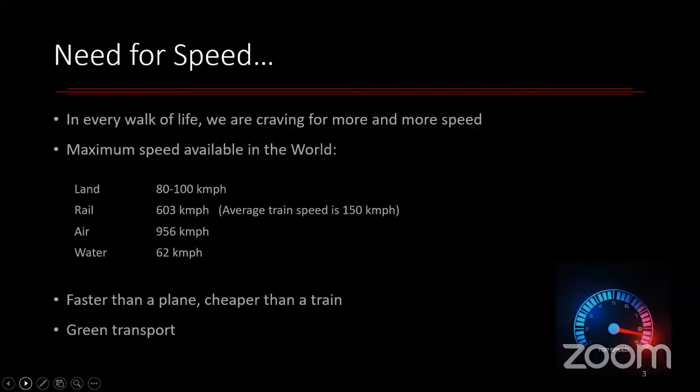So there should be a fifth mode of transport. In 2013, Elon Musk, the founder of Tesla and SpaceX, proposed one technology and named it Hyperloop. He published a paper in 2013, and even after 10 years, it is still under research and development.

What he suggested was a super speed land transport system. And why was it needed? Because he took a survey that found nearly one in 40 Americans commute for over 90 minutes to work every day. And even in India, if we see the maximum, for example between Mumbai and Pune.

So Elon Musk put forward this idea that we can have a super speed land transportation system which will travel at near about 1200 kilometers per hour. This is much more than the speed of an aeroplane.

He suggested there should be a complete vacuum in a steel tube. There would be long steel tubes ranging from source to destination. For example, going from Mumbai to Pune, there will be a steel tube, and inside it, there will be some capsule, called a capsule or a pod. These pods will contain cargo if it's a cargo train, and passengers if it's a passenger train.

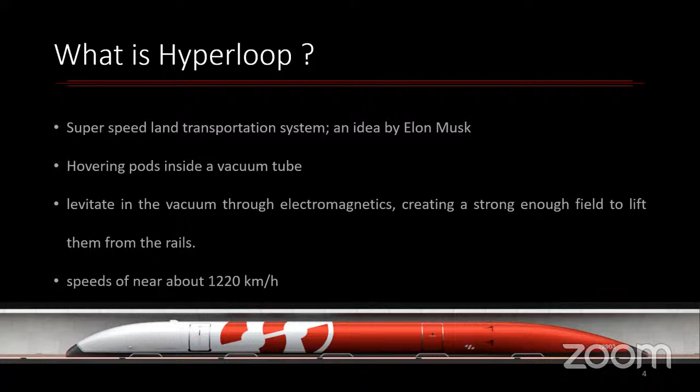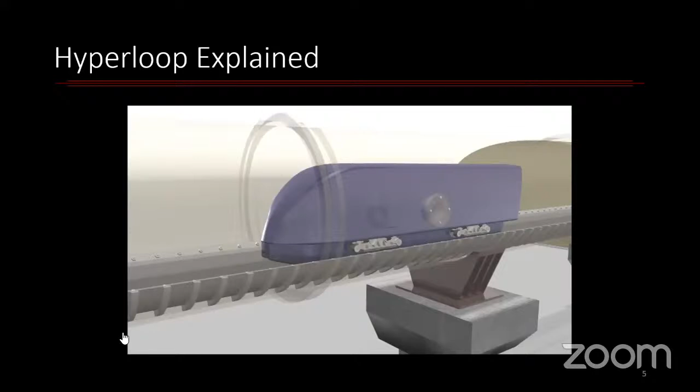I will show you a short video which will give an idea of what Hyperloop technology is all about. Even after the video, I'm going to tell you how the technology works, how this pod is propelled, and how it is lifted over the rails. We'll just play the video, not fully, but up to just 2 minutes. Is it audible, sir?

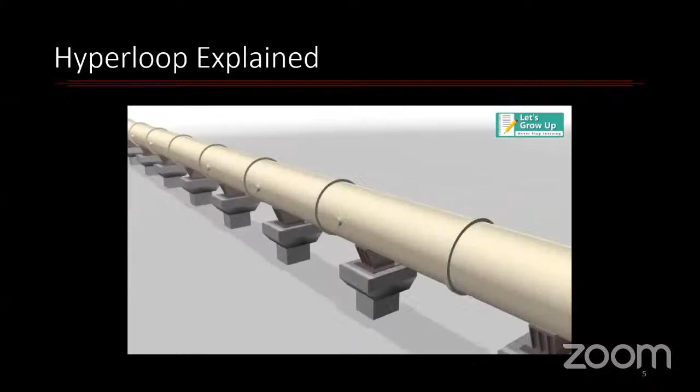No, ma'am. The video's audio is not audible. The video is okay though.

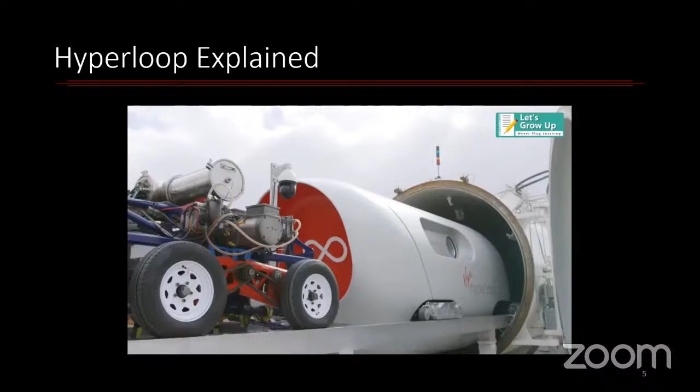Okay, so what I will do is I will do a little bit of commentary over that. That is fine, ma'am, yes.

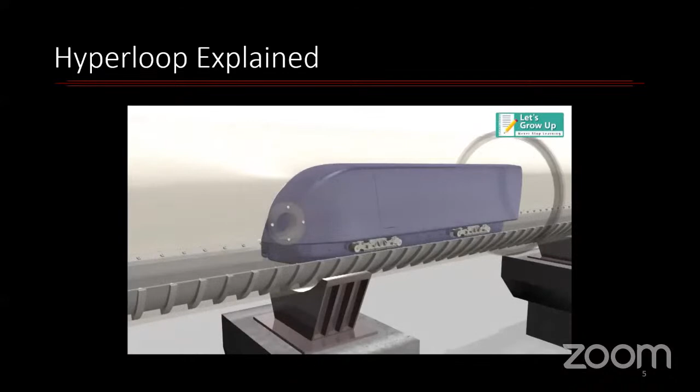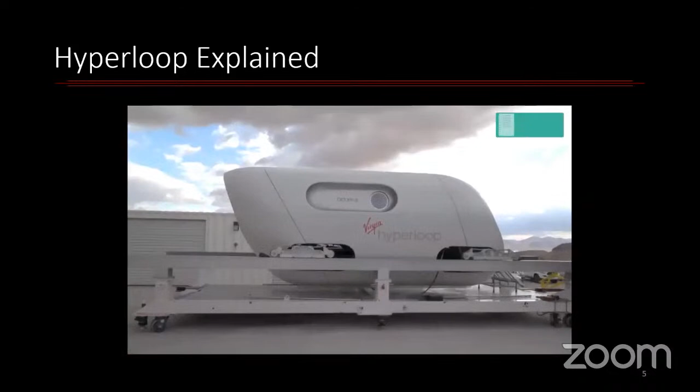So the main attraction here would be the supersonic speed of the pod. Virgin Hyperloop is the company which has first tried this type of technology.

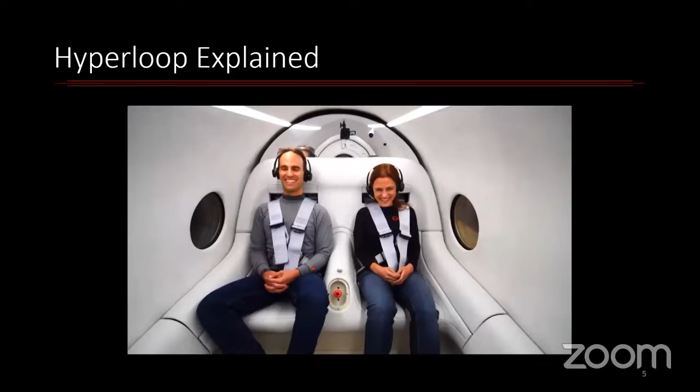This girl sitting inside the pod is Sarah. She is the head of the passenger experience department, and the man is Josh Giegel, the co-founder of Virgin Hyperloop.

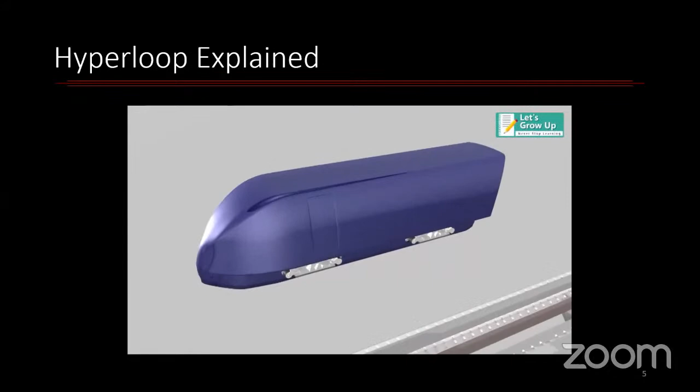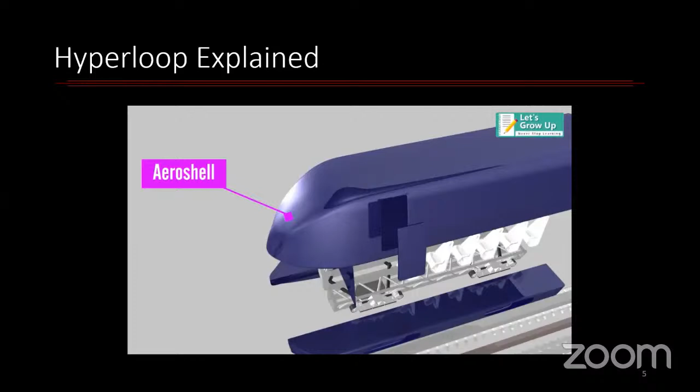Here the levitation theory is explained, showing there should be such type of seats inside the pods for the passenger, and this aeroshell is designed to have minimum air drag. The material used for the pods is carbon fiber because it is lightweight, and this is the chassis of the pod.

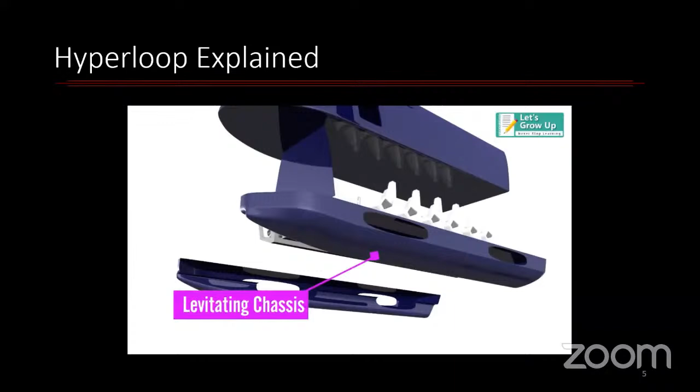It is also made up of carbon fiber, and below this pod there will be a levitating chassis in which electromagnets are used. How those magnets are used, I will explain in the next slides.

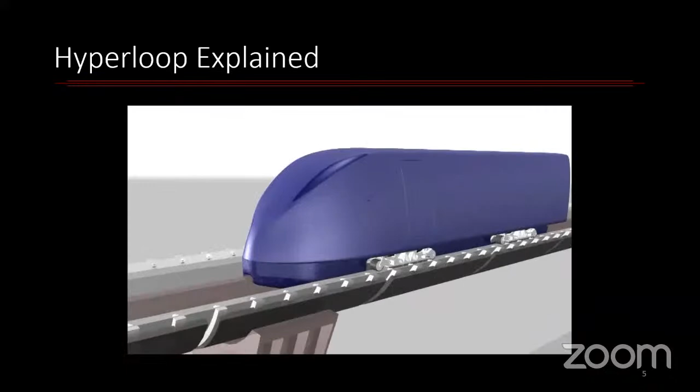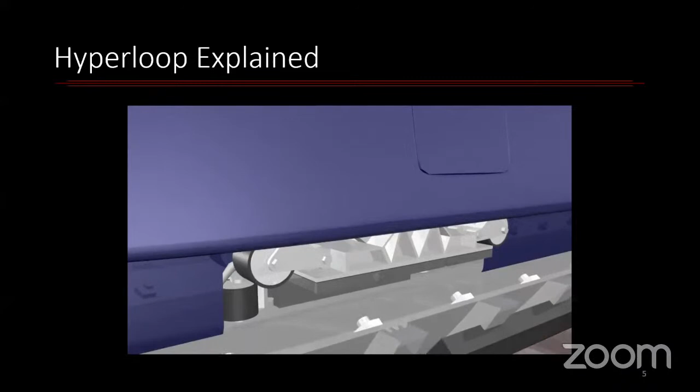Now, the key feature of this hyperloop is the levitation. Once it gains sufficient speed, the wheels will go inside the pod, meaning they will be wound up, and this pod will float without any friction inside the tube.

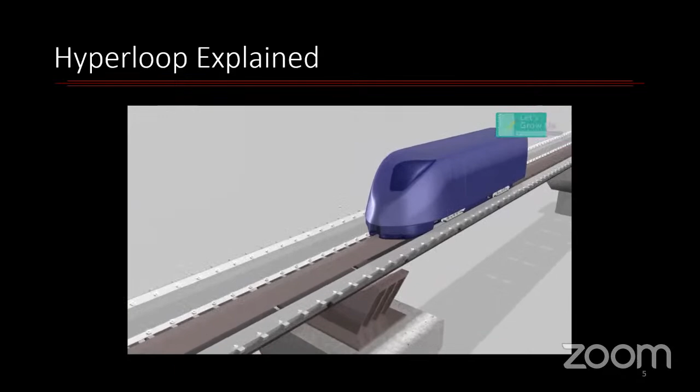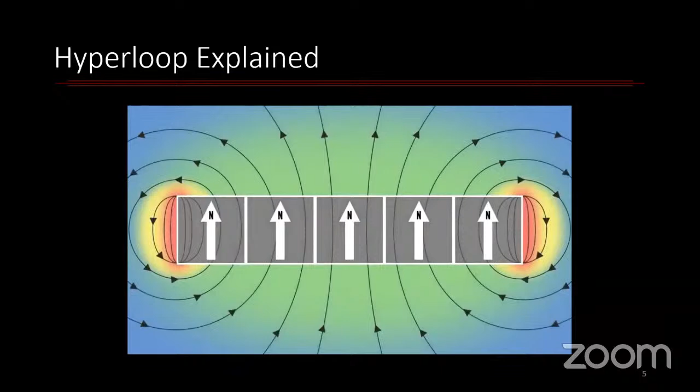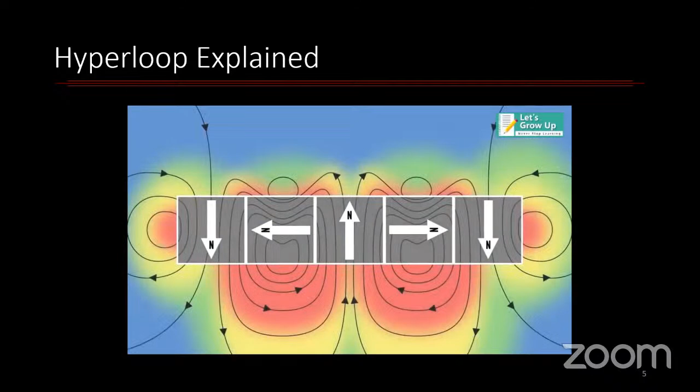And there are the guideways, which are also made of electromagnets. That means there will be actuators to induce magnetism in the material, in which some magnets are placed in a different way, called a Halbach array. All the directions of the magnets are slightly changed such that it creates a strong field which will repel the pod up off the track.

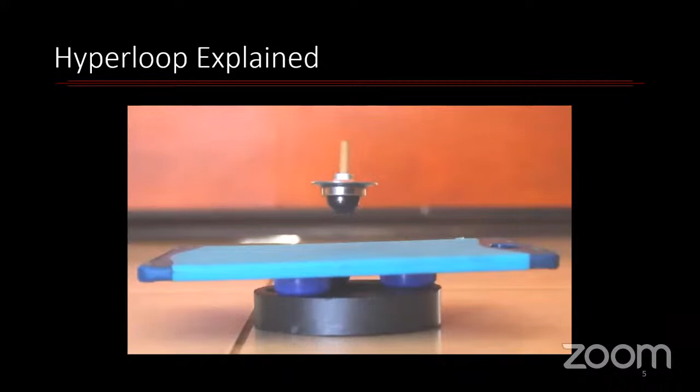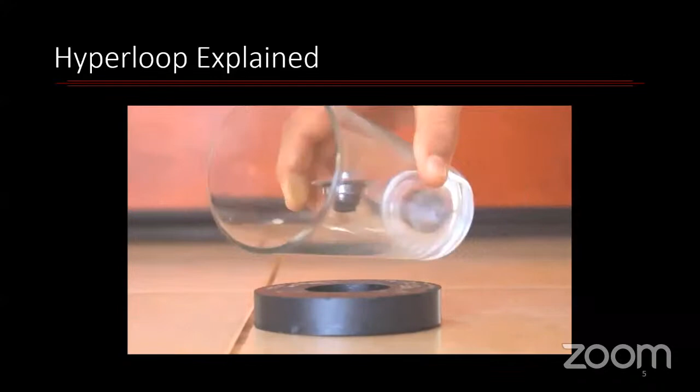In the next slide, I have a diagram from which I will show how the pod will be lifted up and how it will float. It is just a repulsive magnetic force which is repelling the pod.

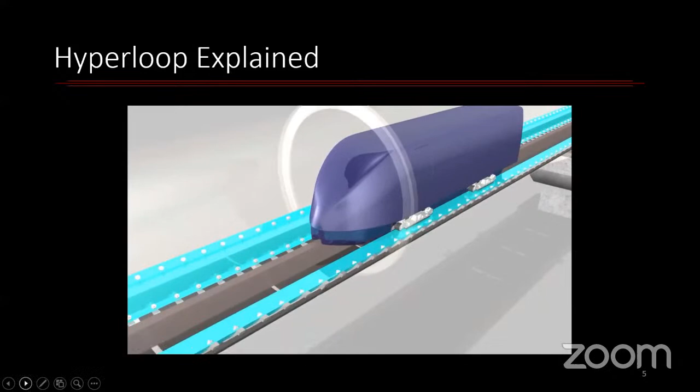Okay, so what I will do is stop here and go to the next slide because anyway the video's audio is not there.

Yes, so we have already talked about why we need Hyperloop as a better transport system, or we can say this is the future train of the world, to reduce congestion between commonly commuted cities like Mumbai-Ahmedabad and Mumbai-Pune, where there is a lot of trade happening between the cities.

If someone wants to go from Nagpur to Raipur or Nagpur to Pune by flight, it takes nearly 10 minutes to fly—even before the air hostess's chocolate melts in your mouth, you reach your destination. But the check-in time, luggage pickup time, and security check together take near about 50 to 60 minutes overall.

And the traveling time again takes a lot when you go by flight between shorter distances—I'm talking about shorter distance cities.

So we always want a convenient mode to connect metropolitan cities or cities with trade, like Mumbai and Ahmedabad, Chandigarh and Ludhiana. At the same time, we want a cheaper alternative than flight, because airplane travel isn't everybody's cup of tea every time, and ticket prices vary depending on when you book.

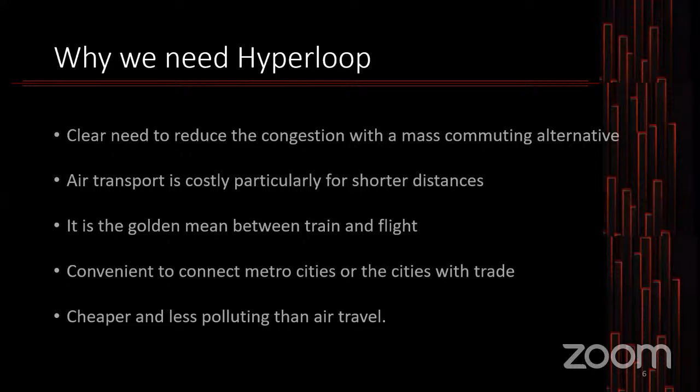So we always want a cheaper and less polluting alternative than air travel. The Hyperloop is a technology that will be completely clean—we can even put solar panels on the tube, making it a completely clean energy system. Now let us look at the technology.

The technology used in this train would be purely magnetic levitation. As we have seen in the video, the pod—the blue colored one—will be levitating inside the steel tube. The material of the tube would be steel, and levitation is nothing but the ability of a material to stay suspended above the track.

Now here the train will be using three sets of magnets, in which the first set would be used to repel and push the train up off the track, so that the pod will be lifted up and stay suspended above the track. That is the function of the electromagnet set 1.

There will be set 2 of electromagnets which will move the elevated train ahead, so there will be linear motion of the train, taken care of by another set of electromagnets. And it is again our duty to put the pod in the center of the tube - it should not go off center of the track. So for that, the third set of electromagnets is put inside the steel tube.

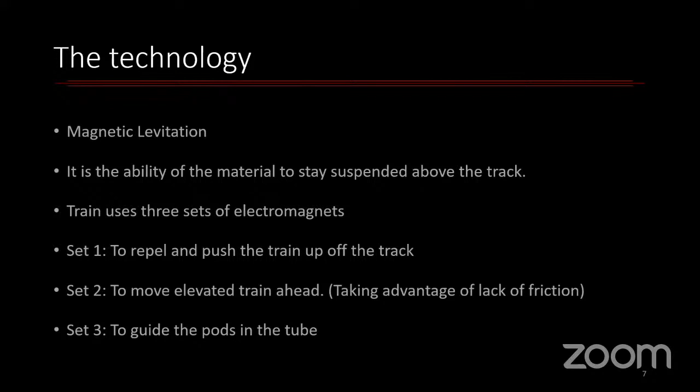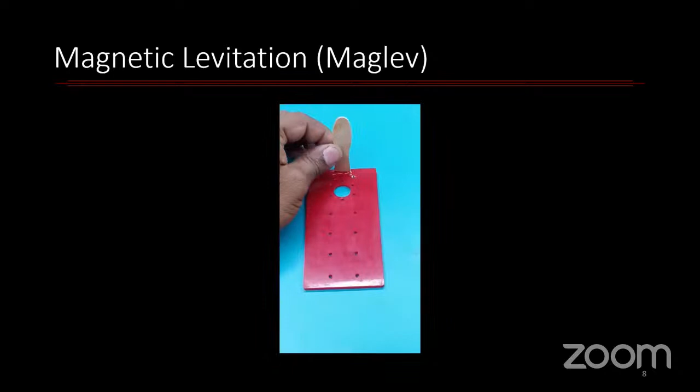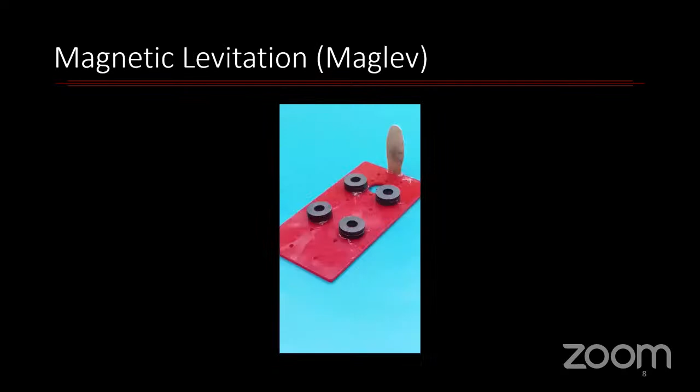So for understanding the magnetic levitation, we have a very small experiment. There will be a set of magnets put here - this is just to understand how that magnetic levitation, or in short maglev, is done. There will be a repulsive force of magnetism which will push the pencil off the red plate, because the arrangement of the magnets is done in such a way that it will repel the pencil up. Let us imagine that this pencil is a pod, and inside the pod the passengers are seated.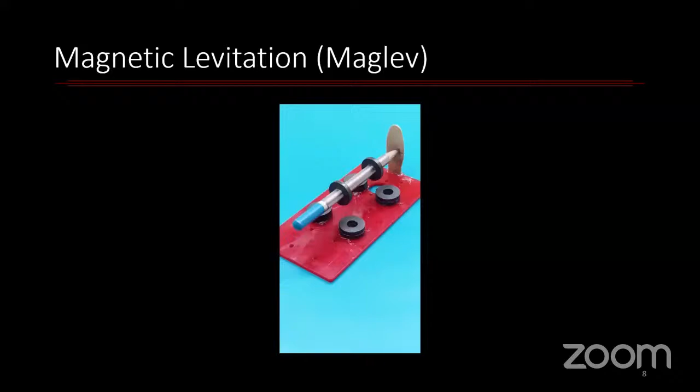Even the batteries are on board, meaning in the pod the batteries and the passengers are both there, and the electromagnets laid down the guideways are pushing the pods upward. So that is the experimentation for the set 1 electromagnets that will push the train up. Now how can it be done?

For levitation, that means for keeping the train or pod up on the guideways, there are two methods to levitate or suspend the pod in the tube. The first method is called EMS, that is electromagnetic suspension. This electromagnetic suspension will use the attractive force of electromagnets placed on the guideways and on the train to levitate - one electromagnet will be on the guideways and one of opposite force will be kept on the train.

Now this is much simpler technology, but at high speed it is difficult to maintain the correct distance between the train and the guideways.

Now one question must arise - how much should the pod be lifted, because it will be heavy. Right now, the various technologies being researched consider a maximum weight of about 15 tons. So this 15 tons should be floating in the tube. How to maintain the correct distance between the guideways? That distance is only 15 mm. So you can imagine how crazy those tolerances would be, and how difficult the design would be in that case.

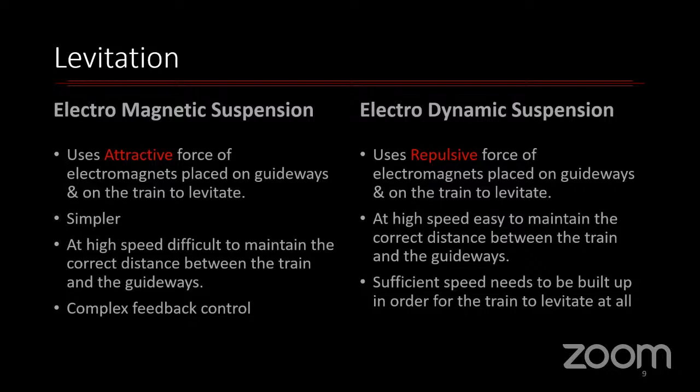So the most commonly used technology to levitate the train is electrodynamic suspension. Now, once the train is suspended, the next task is that the train should go ahead, it should move in the forward direction. So how should linear motion be given to the train?

The answer to this question is the linear induction motor. Motors are used for giving the speed. So how is this propulsion done? Propulsion is basically the force that will drive the train forward. These magnetic levitating trains, maglev trains in short, use electric motors also. And we know what an electric motor is. The normal electric motor uses magnetism to create torque and spin the axle.

A linear motor is just an unrolled version of this. So the motor we are going to use in the hyperloop is made by unrolling the outer winding, which I'm calling the stator. If we unbound it and put it in a linear direction, then such an arrangement, shown in the third diagram, is called a linear motor. This motor will give a linear force, it will experience a linear force.

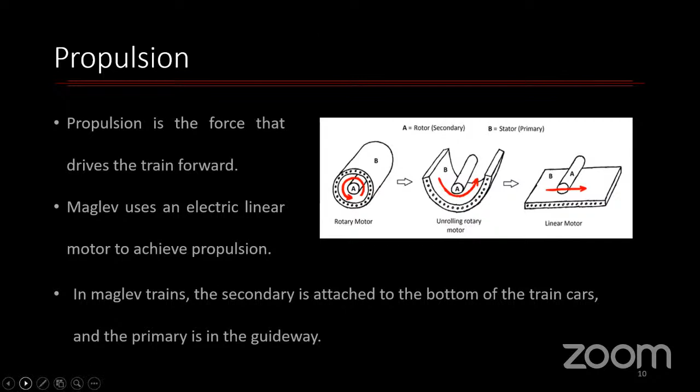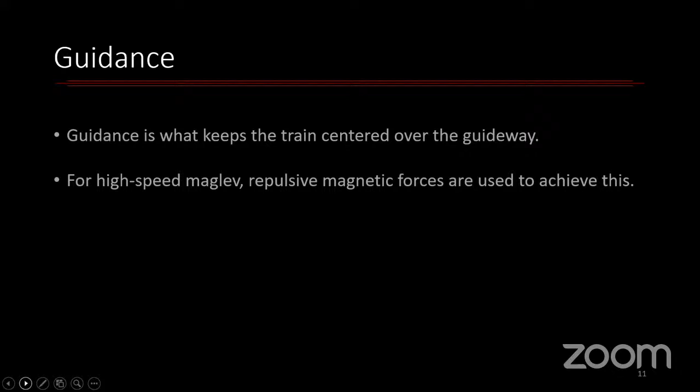No problem. The third challenge is to keep the pod in the center, so a third set of electromagnets is used to keep the pod in the center of that steel tube. Let me show you a diagram.

The third design is slightly changed on the sides. That design was given by Japan. So there are three sets of electromagnets, shown by blue arrow, red arrow, and green arrow. The blue will lift it up, green will put it in the center, and the red one will move the pods in the forward direction. So I have named this levitation, propulsion, and guidance.

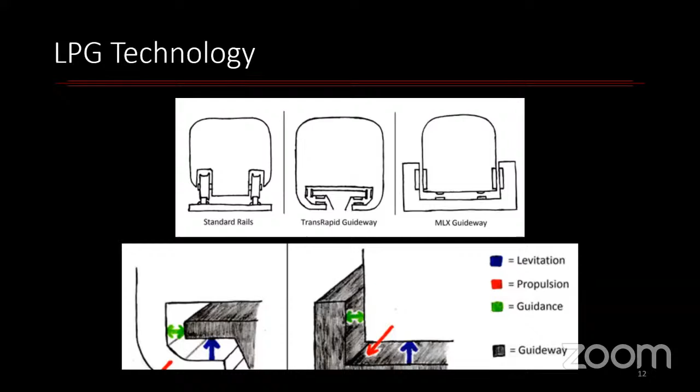LPG technology. You will not see this term anywhere on the internet, I just thought we should give some name to this technology, so I took the short form of each motion: LPG. Now let us talk about the pressure in the steel tube.

This black line below is the reference line, or datum line, which is the sea level pressure we always call 1 bar. The normal atmospheric pressure is always 1 bar, equal to 1.01325 into 10 to the power 5 Newton per meter square, or in pascals, 101325 Pascal - that is the normal atmospheric pressure.

Now, as we go up, the pressure reduces. The second dot is for Mount Everest, which is near about 29,000 feet... actually at that altitude the pressure is always 35,000. After that, commercial airlines, flying near about 38,000 feet, experience a pressure of 20,000 Pascal.

This is the Armstrong limit at 60,000 feet. This name is not given for Neil Armstrong, but for a physician named Armstrong, who discovered that at 60,000 feet, at around 6,300 Pascal pressure, the normal body temperature is itself the boiling point of water. So if we go at 60,000 feet and experience this pressure, our blood will start boiling.

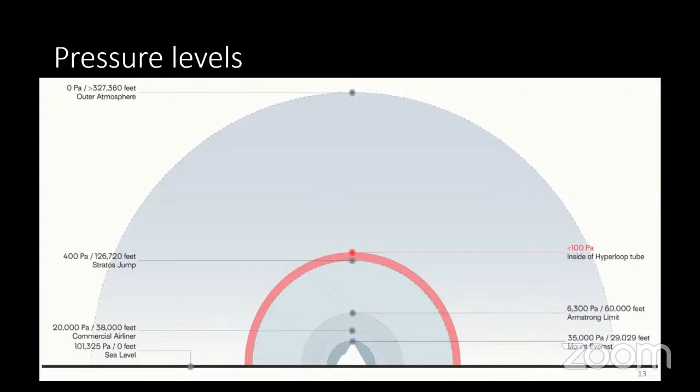And now comes the red dot, which is the pressure inside the hyperloop tube. But don't be afraid, that will be the pressure between the pod and the steel tube. Inside the pod, there will be normal atmospheric pressure where passengers are sitting, so there will be no inconvenience - both temperature and pressure will be taken care of, kept normal.

This is the design given by Elon Musk in 2013, and the thing started from this design. He said there should be a design of a pod with seats for near about 28 people that we should carry in one pod. This hyperloop will be having only one pod floating above it.

The next pod will be separated, so there will be no connection like train bogies. Unlike train bogies which are connected with each other, there will be no such connection between two different pods. One pod will be separated from another by a distance of near about 37 kilometers.

That is the braking point, because if the pod which is ahead stops suddenly, or there is sudden power failure, then the pod behind should stop by itself. So people are trying to make all these things autonomous, that if the first pod stops suddenly, the second should also stop. So this all should be autonomous.

This inlet fan and compressor design is no longer in use right now. No company is working on this currently. This was a very initial design given by Elon Musk, that there should be a compressor which will compress the air, and there will be an air cushion in between, because we have to displace the air. That was a very rough design given by him, but since we should know the history of the design, I have put this on my slide.

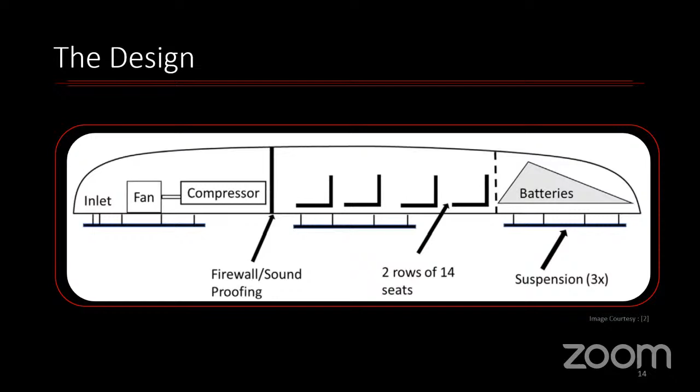Now, who is making these hyperloop trains all over the world? There are so many companies, near about 10 companies, but Virgin Hyperloop One has the latest technology, and great research is going on in this company.

Even the Maharashtra government had done one MOU with Virgin Hyperloop One to make a Hyperloop train between Pune and Mumbai, but after that the government changed and that MOU was cancelled. But now we can again hope that project will come back into the picture. So these are the makers all over the world.

Now let's see the timeline, how this transport system of trains came about, and how we reached up to the hyperloop technology, how that concept was conceived. In 1830, the first locomotive ran at 50 kilometers per hour speed. So from 50 kilometers per hour, now we are hoping for 1000 kilometers per hour. As I said in the initial slide, we are craving for hyperloop.

After the first locomotive train in 1830, in 1903 we got the first electric rail car, which ran at 210 kilometers per hour. Then in 1964, the technology that we are seeing right now started in Japan, the Shinkansen, which is the name given in Japan, but the world recognizes this train by the name bullet train. So the first bullet train started in Japan in 1964.

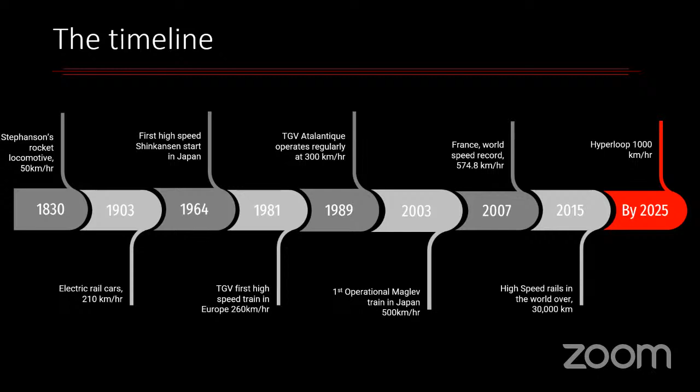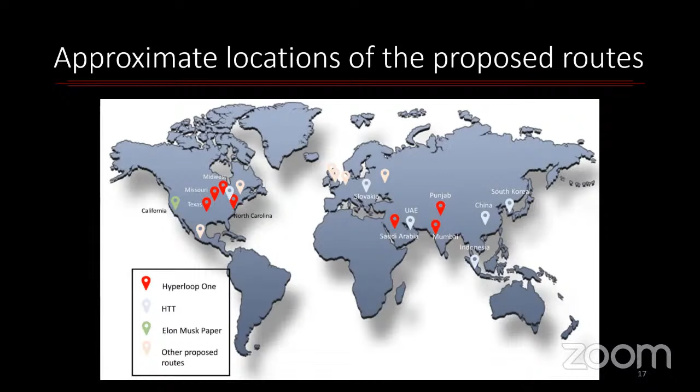Now let us talk about what is the current status of Hyperloop. We have already seen that in Punjab and in Mumbai there are plans. Government is planning to do the Hyperloop, but what is the exact status of Hyperloop technology in India?

Our Ministry of Railways has done one MOU with IIT Madras that they will build a Hyperloop system under the Make in India initiative. This Hyperloop train will be completely indigenous and made in India. The Ministry of Railways will also help IIT Madras build a center of excellence for Hyperloop technologies, with research and development going on for this project.

Made in India and IIT Madras talked to railways about the Hyperloop in March 2022. Since then this project is going on, and near about 50 students of IIT Madras who passed out in 2017 are still working on this project to make the Hyperloop technology in India. The Punjab government has also done a different MOU with Virgin Hyperloop for making the Hyperloop for their state.

Now, this is the most important question till now: can our bodies handle the Hyperloop? We have handled the acceleration in flights, but can we sit in a pod which is just hovering inside a steel tube with no pressure or low pressure, and that will be accelerating? Consider the speed is simple, but the acceleration, when it comes to the derivative of speed, is always difficult to handle.

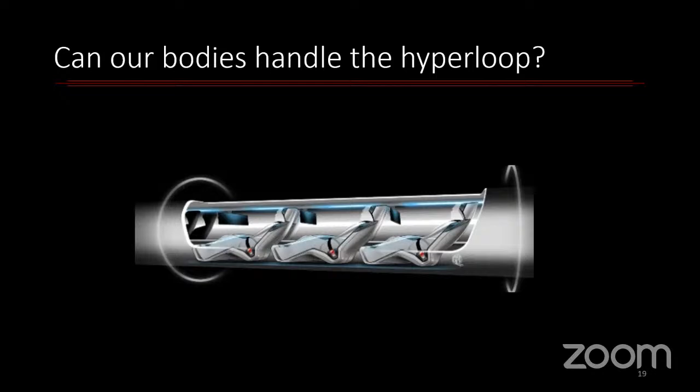Whenever there is air drag, there is air suspension, but the companies say that inside the pod there is no such thing, because the pressure inside the pod will be normal pressure and temperature conditions. So the makers are saying there will not be any difficulty in handling this speed for any human being.

Another big challenge is the economy. When Elon Musk initially evaluated this project, he said the cost of a one-way trip from Los Angeles to San Francisco would be $20 per passenger. With today's conversion factor of rupees to dollars, that comes to nearly 1600 rupees. I hope that with the speed we are going, this is a very comfortable price for a ticket.

But this idea was put forward 10 years back, and a lot of things have changed since then. GDP has changed all over the world, and inflation has increased. So makers around the globe are saying that whatever economy Elon Musk put forward, you should now multiply by 3 times. Everything is much more expensive now.

But if they increase the capacity of the pods, this will obviously come down in cost, which is why it will take more time for this to come into the picture. Right now Virgin Hyperloop and Hyperloop TT all over the globe are trying to calculate the mass that they can levitate at the same time with the available electromagnets. Because they always have to look at the battery weight and cannot exceed the maximum weight limit, they're calculating what amount of mass, or cargo, they can add given the available battery, and looking at that economy.

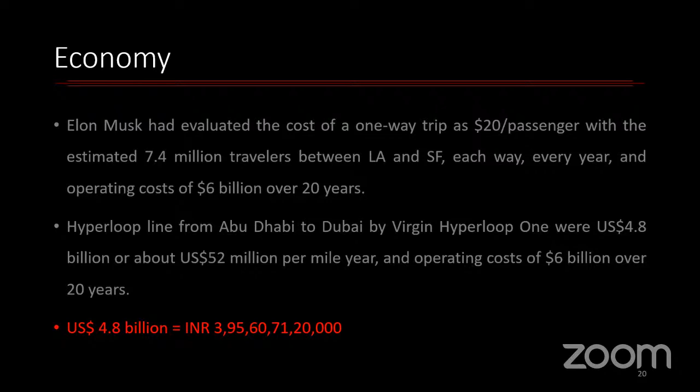All the figures I've mentioned are in dollars, because right now the makers are in the US, Japan, or France. I converted 4.8 billion US dollars into rupees and couldn't even read the figure. Initially we feel this is a huge amount, but the usage over 20 years, or even more years, will pay it back to us.

Now let us discuss the challenges ahead for making the Hyperloop a reality. Why did it take 10 years, and maybe 2 to 3 more years, for the Hyperloop to happen? Why are we not traveling in Hyperloop right now? The reason is these many challenges.

The first challenge many researchers raised is that we cannot handle the acceleration, but this has been addressed. Research has shown that we can handle the acceleration in flight, and even in the pods we would be able to handle it. They are saying they will not exceed an acceleration of 0.3 times gravitational acceleration.

The second challenge is, of course, economy, because sponsors are not that ready to sponsor this very high-aimed project. Then, what if a sudden power failure happens? This is a system people have to work on, because there should be auxiliary wheels.

So in case of power failure, they should come up. That is a challenge for the researchers. Everyone working with the Hyperloop company is essentially a researcher right now, because nothing has been proven in reality, and they are just trying and testing different sorts of technologies.

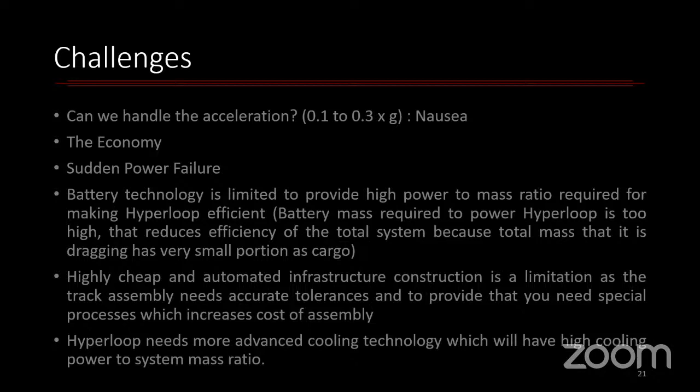So we can work on small projects, like a small prototype of the slide I showed you, in which a pencil was levitating with electromagnets using repulsive forces. We can carry out small projects and answer the questions researchers worldwide are now dealing with, like IIT Madras students putting in their efforts to make the hyperloop a reality. So the cooling technology is one more challenge that we have there.

Now let's make this long story short. I'm winding up my lecture soon, because the time given by BCSR was 1.5 hours. But at 2 I have to go somewhere. We have an NAAC visit tomorrow, and the delegates are coming one day before, so we have to make certain preparations there. Of course, you can surely understand.

So I'm making this long story short, and I'll tell you what the thing is all about: to accelerate a certain amount of mass at a certain acceleration. Now, the total force required to move the system would obviously be mass multiplied by acceleration. But in this case, we have to reduce the drag. There would be some air drag if air is present, and electromagnetic drag. Why does this electromagnetic drag occur? Because whenever we use electromagnets, eddy currents are formed, and these eddy currents are the losses we have. So this is mass multiplied by acceleration, and then we have to subtract the air resistance and the electromagnetic losses that are there.

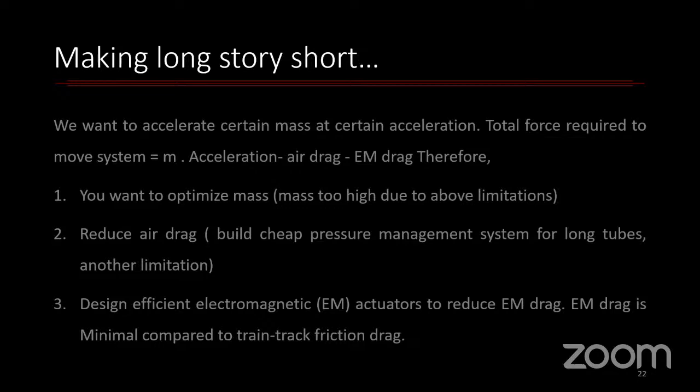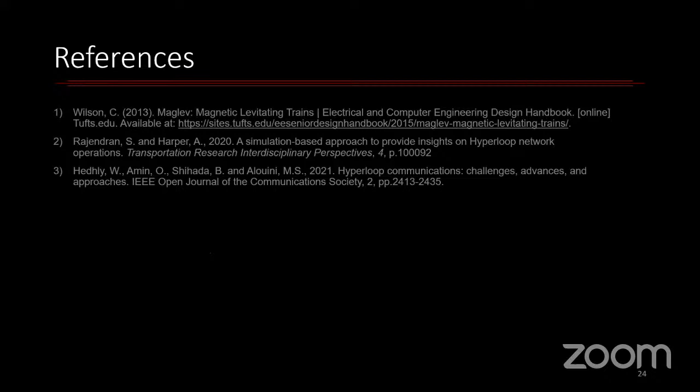So if you have any questions, I'm open for your questions.

Excuse me sir, he says sir, can you put the forum open for questions? Yes, already done ma'am. Okay sir, if any, in the chat box. Okay thank you sir. I will put my number in the chat box or an email ID, so if anyone has questions, I'm open for solving them. Okay fine ma'am. Also share the PPT ma'am, so that... okay sir, I will share my PPT. Okay thank you, thank you sir, thank you very much. Shall I leave the meeting? Yes ma'am, you can leave, and all the best. Thank you so much sir for giving this opportunity. Yes, thank you sir.